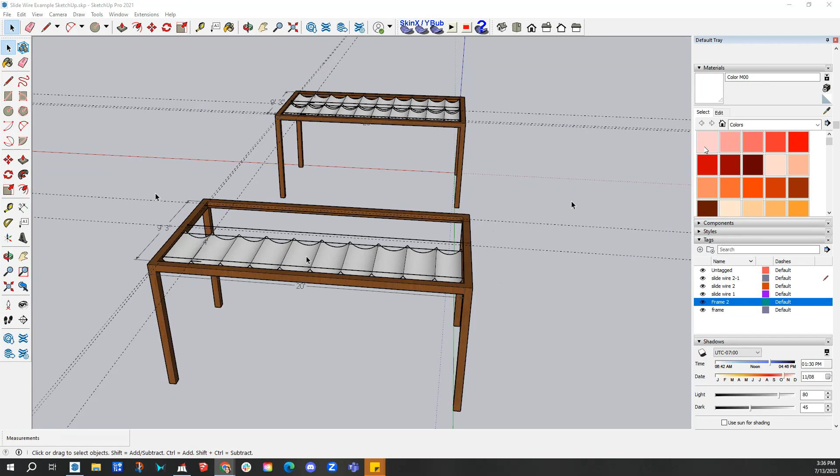Today I'm going to show you how to do a quick slide wire example in SketchUp. So you can see I've already created my frame here that we're going to work with.

These two lines here indicate the cable that you're going to string across to attach your slide wire to. We'll screw the clips onto the aluminum bars. At intervals here, there's an aluminum bar that we sew the fabric around, so the aluminum is sewn into the fabric. Then there's a little clip attached to the bar, and the clip is what attaches to the wire and slides across it, so this can slide open and it can slide closed.

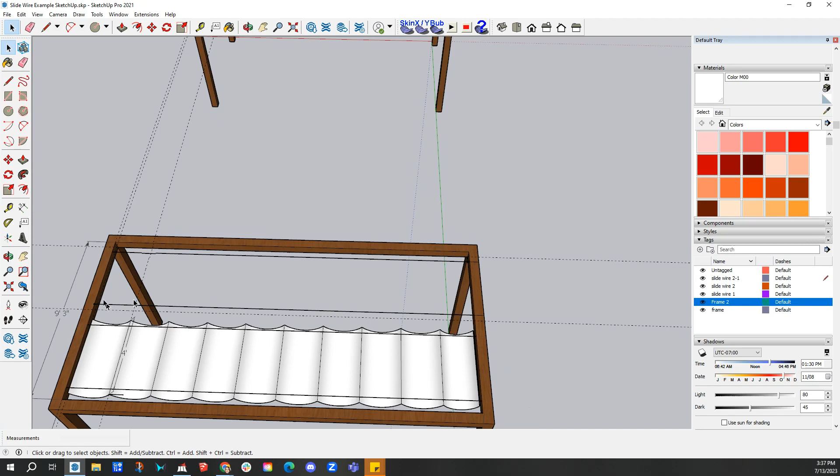Your fabric needs to hang a couple of inches outside of this wire. So to give it a proper look, we can place the clips wherever you need to - I can give you direction on that when it comes to manufacturing. But for this example, I'm going to do 4 inches beyond the edge of the fabric, which is where the clip will go. So I've put in some guidelines here.

This first one's a little hard to see, but this one is 2 inches away from the end of the frame. In this example, I have 2 feet as the spacer between the bars, so that's what this guideline here represents - it's 2 feet from this one. Then I have additional guidelines that come out from my wires, an additional 4 inches, so there's a guideline here and a guideline here.

I'll erase this one real quick and show you how I did that. So, tape measure tool, go to the wire, come out, make sure I'm on the correct axis point, hover over something parallel so I know it'll work, and type in 4 inches. That gives me my guideline.

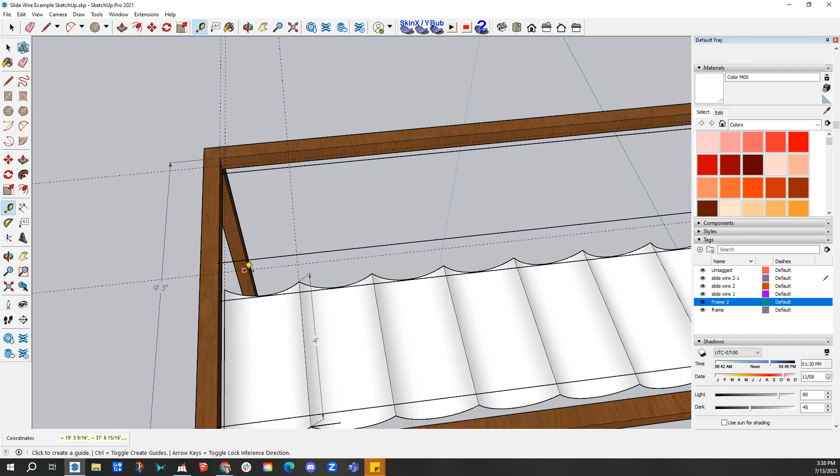The way I created this to get the curve right is actually fairly simple. I use the 2-point arc tool and use the intersection of my guidelines here - here's point one, point number two.

Then I have to tell it how deep I want the curve and make sure it goes in the right direction. That green arrow indicates I'm on one of the horizontal axes, and I'm going to push the up arrow on my keyboard to put it on the vertical axis. So I'm going to tell it I want the dip to be 6 inches - that's the dip there.

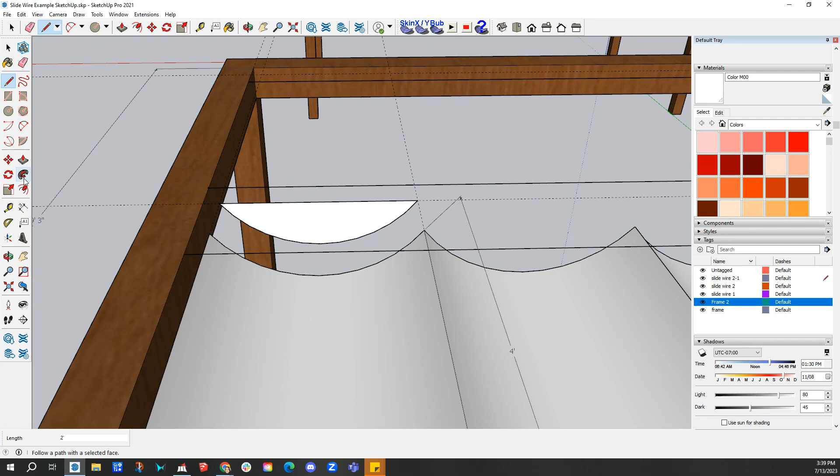Then I'm just going to take the pencil tool, the line tool, and close the top point. Then I'll take my push pull tool and push it all the way out to my other guideline on the other side, so I have this nice...

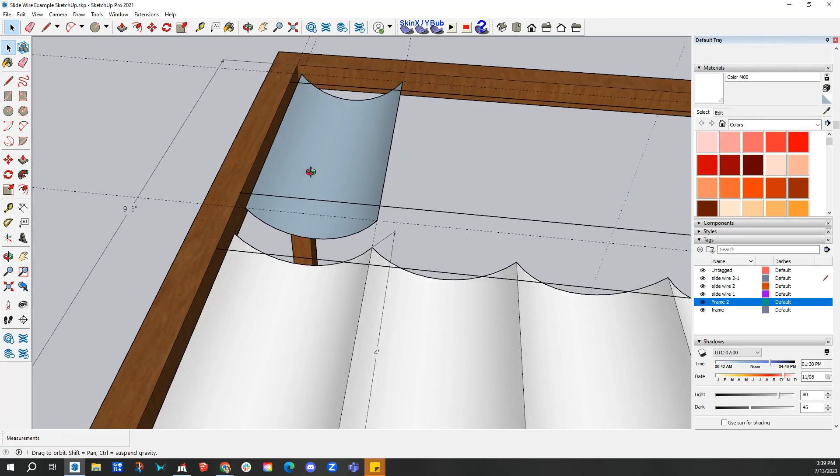semicircle half shape going on. Then all I have to do is delete the other panels that have been created in that top line, and I have a good looking panel here.

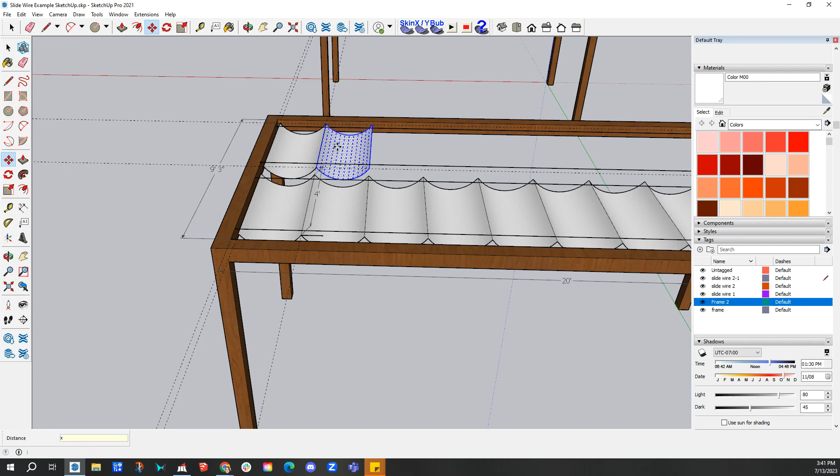So I'll take a color here, and I'm going to make it white. Then I'm going to use the repeater tool to just copy this down the line, which is very convenient. Select tool, double click, move, then push the control key and click and move it over one. Click it, then push X for times - we want 9 times - and hit enter, and it replicates it all the way down the bar.

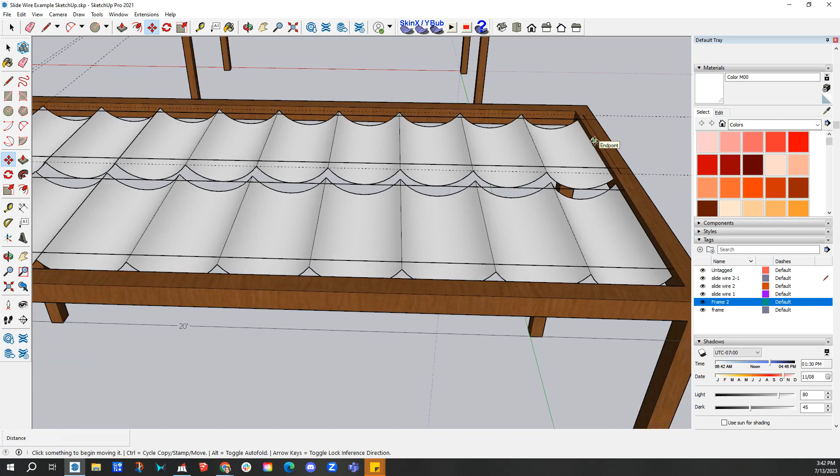Now the 2 foot spacing isn't an actually perfectly even distribution for the frame that I created, so you can see that my last panel does merge into the existing frame. But I think overall it still looks nice - it still gives the right impression of what we're trying to do, and we have a nice...